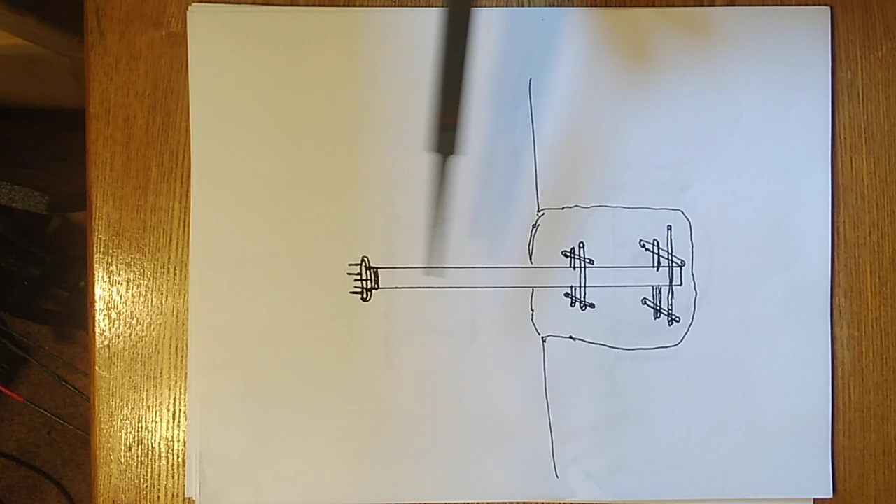Dig your hole nice and bell-shaped, nice and square, where you can set the whole pole in there, then fill it with concrete and let it set. Square everything up, level it up, make sure everything's right, and let that thing set. Let it set overnight, let it set the next day. Don't fool with it, just let it take, because you want this cage to be real secure in this concrete. You don't want any shift in your pole or any movement.

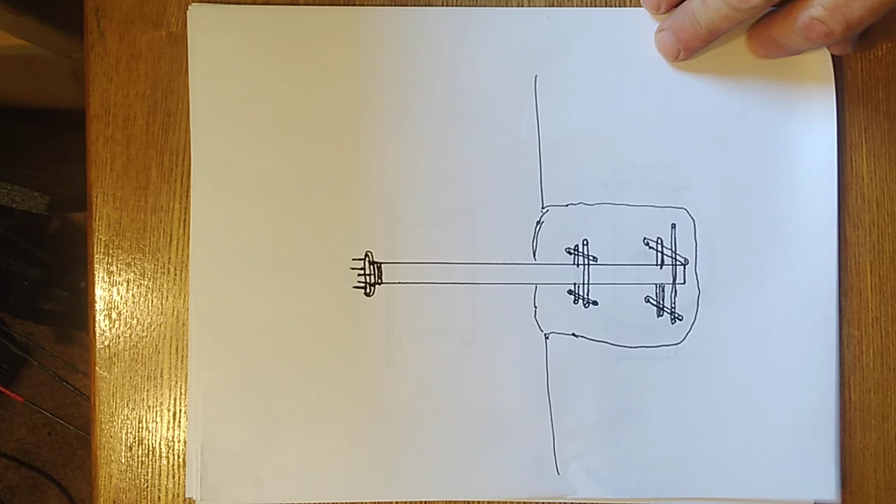That's the key. Now this mill, you can take the top off of it, but you're always going to have the pole in the ground. This isn't a portable mill.

Now once you get that done, this mill is for somebody that's got a Metabo blade, a welder, and a little bit of skill. It's nothing hard to make.

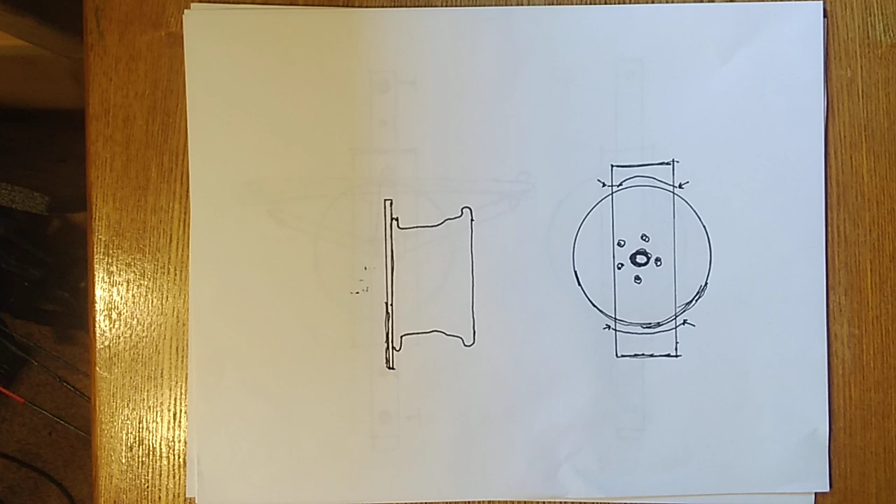When I build my mills, I milled my plate out all at once and made it myself. But I'm going to show you how you can make it with a hub. Get a wheel, a rim, get as deep as you can get it that fits onto that axle, so you have room to get your hands underneath that plate. Get a nice piece of square plate.

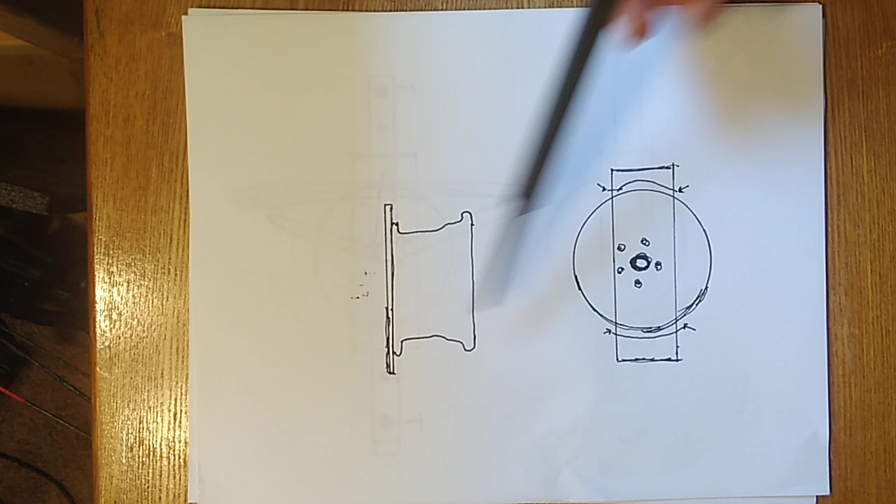Don't be chintzy with this plate, man. This plate right here is what you're building off of. Center it all up, weld it all the way on the bottom, weld it all the way across. Get it all centered up and situated. Once you're at that point, then you can come on with your top thing.

Now your center pipe that's going across it, the longer you make this piece, the better. Everybody wants a mini mill, but the longer you have this piece, the better. A 10 foot piece would only be 5 foot from the center coming out.

I would do probably a 16-foot piece across your center pipe. Weld that all the way. Don't just tack it here and there. Weld that son of a bitch on there. You want it really strong.

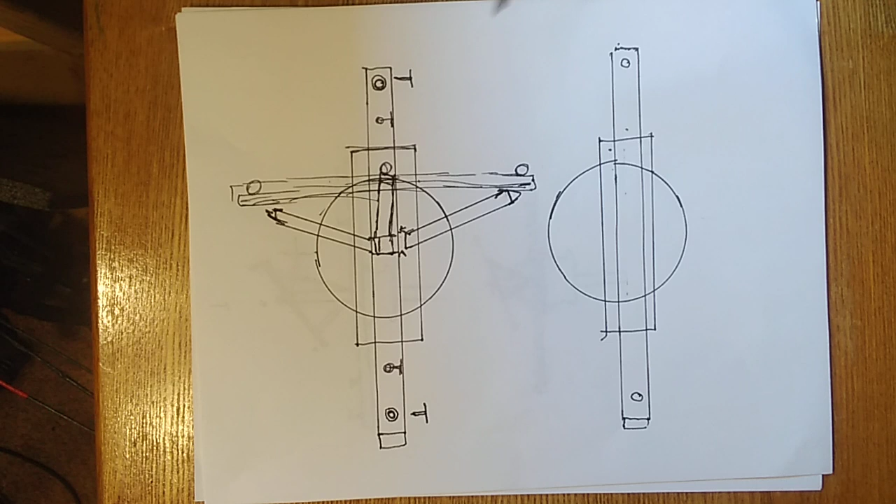Drill you some holes in it and then weld your nuts on it, so you can screw down. Get you a piece of all thread, cut it, put some flat bar on it. Use about 3/4 inch all thread though, so you can really put some pressure down on it. Y'all understand what I'm talking about, right? Drill the hole, weld a nut on that hole so you can tighten down the all thread on it and push down on your thing.

On the center of your pipe right here, you're going to come straight up, then run your crossbar. I usually put one about 8 foot right there. It's only going to be 4 foot from center and 4 foot from center. So I run my crossbar right there, run a 45, brace up, and then you'll put one down.

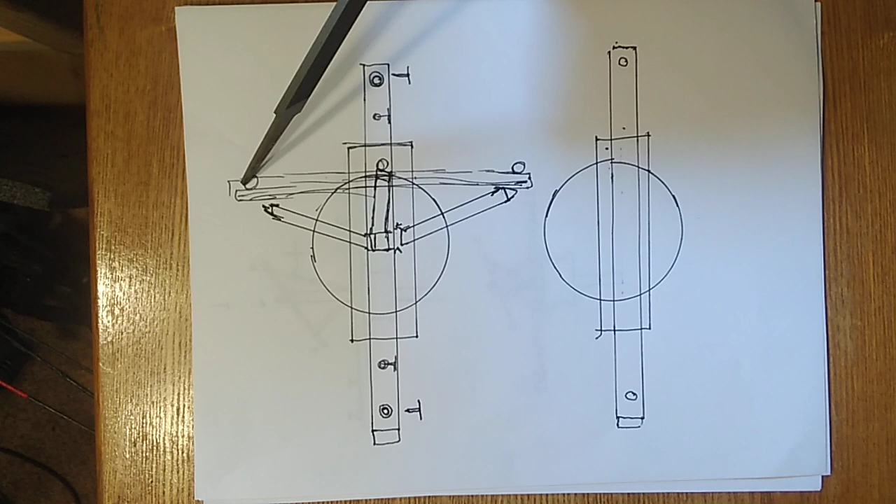Okay, and on top of your crossbar on this side, you want to put a nut big enough for your cable to go through, a nut big enough for your cable to go through, and a nut big enough for your cable to go through. Once you're at that point, it's going to kind of look like that.

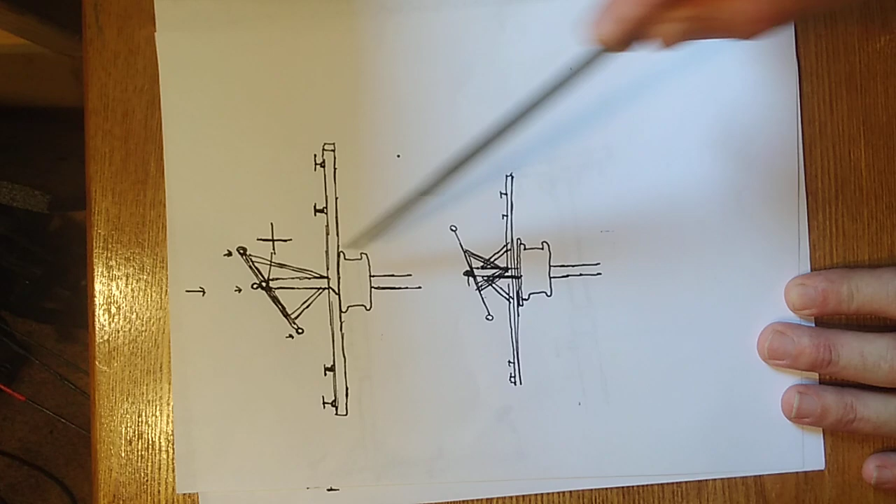You're going to have a bar going up. Go up pretty high with it, 2 foot don't hurt. And you're going to have your bar going across, nut, nut, nut. You weld it up here, and then down here you're going to weld it like that. So that's kind of what it's going to look like, okay?

And you're going to have everything ready for it. Once you're at that point in the course, make sure everything's squared up, and then you should be able to hit this thing right here and just hit it one time, and it'll spin like crazy. It should spin really easy and really good at this point.

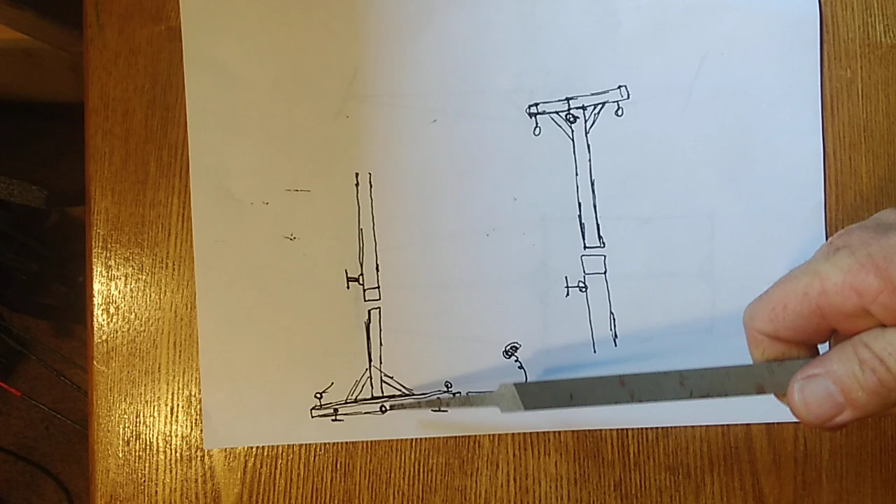Now, once you get to this point, you're going to have your ends. On your end pieces, what I do is I come out. You want to have a pretty good piece. If you have a 16 foot here, you're 8 foot from the center right here, okay? Now, if you put a 12 foot bar on your 12 foot stick off of your end, this piece is up to you.

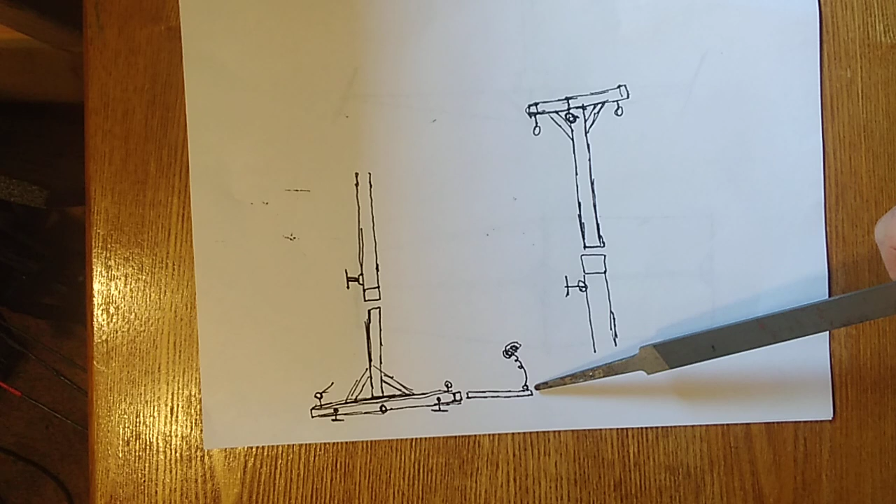If you want your dog to be running on an 8 foot bar, that's it. 5 foot, 6 foot's plenty, 5 foot's enough. And then I do the same thing, weld a nut, put a little all thread right there where I can screw in, get another bar that'll fit in there, and you can put your bait, if it's cowhide or whatever, and you can make it shorter, longer, whatever.

Weld your end, nut in the center. Same on your counterweight side, same thing. Nut, right? Your pin's right there, so you can slide it in and out however long you want it. Once you get all that done, you're almost there.

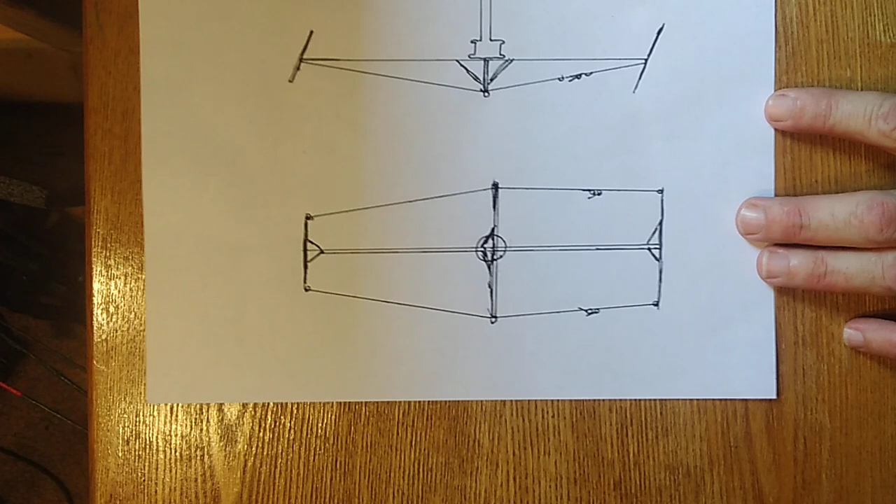So once this would be like a top view, okay? Like if you're looking down on it, you're going to have a cable coming across your top to that bar right there, coming across where you put your little nut right there, and onto there. Same here, same going around. So it's going to kind of look like that.

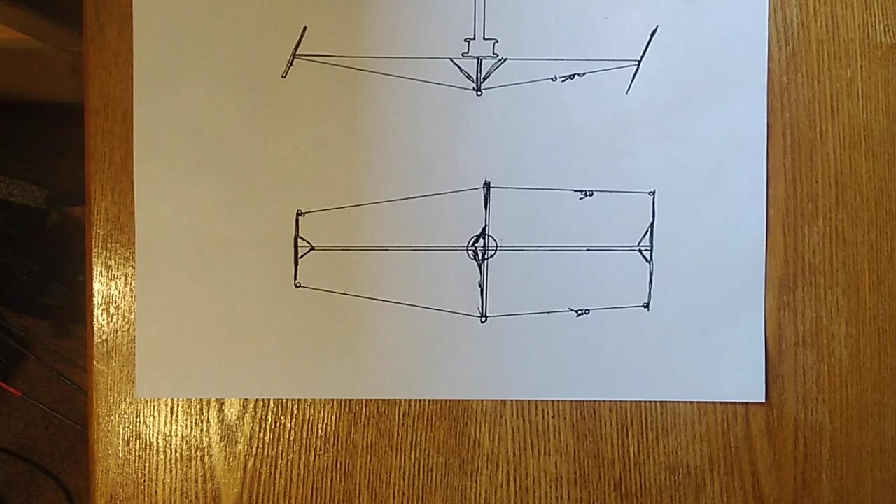Run your cable, mount it to here, put you a loop in it, put you a ratchet strap, a loop, your cable, mount it there, and then tighten them together on all 4 of them. And when you're done, it'll kind of have that look, with the up pull on them, but it'll be on all sides. And it'll take all that twist that people are talking about. It'll stop a lot of that. It'll be a real firm mill, you know what I mean?